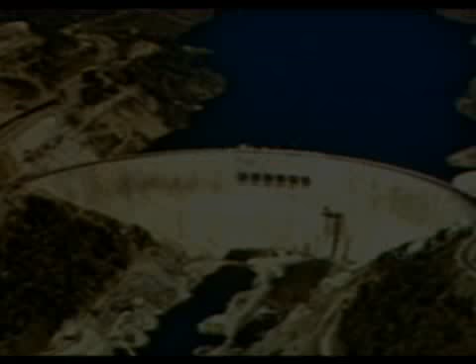Impregilo SPA, listed on the Milan Stock Exchange, is Italy's leading engineering and general contracting company in both the construction and environment sectors, and it's among the main groups on an international level. Impregilo SPA as a company has been active on 5 continents since 1959, while the original shareholders were present on the worldwide market since the beginning of the past century.

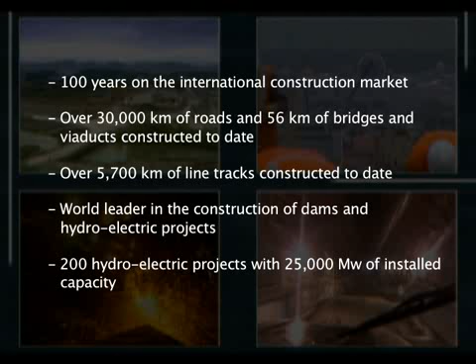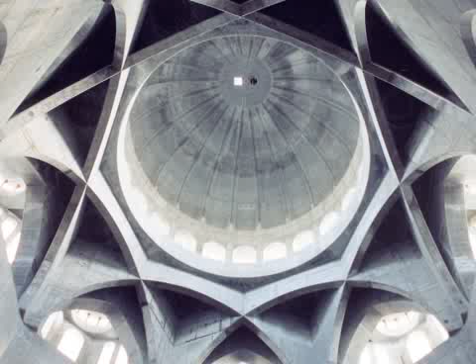From the early 1900s and after the First World War, Girola and Lodigiani, and later Impresit, took part in the construction of major civil engineering works and infrastructure projects, both in Italy and abroad. Subsequently to the incorporation of Cogefar-Impresit and Girola-Lodigiani, the international market was jointly pursued by said companies on a highly competitive basis, participating in the construction of huge projects the world over. The head offices are in Milan, but Impregilo is operative in many parts of the world.

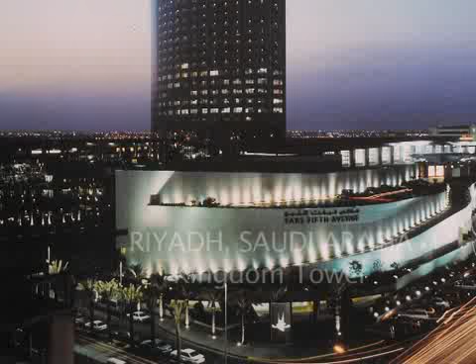Impregilo employs over 20,000 people throughout the world, of which over 1,000 are engineers. At December 31, 2007, the group had a total revenue of €2,530 million, that's construction works only, and a construction backlog of

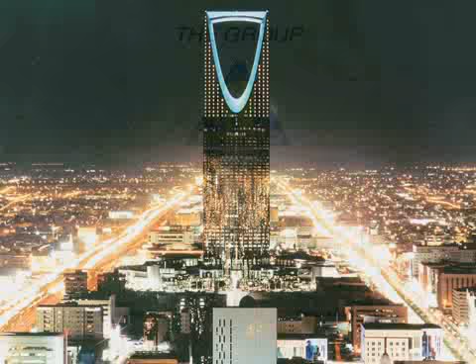€16,944 million. For the execution of the 6th Crossing Suspended Arch Bridge, Impregilo will work very closely with the nominated subcontractors, Cimolai SPA, being involved in the supply and erection of the bridge's steel structures, Cowi and Eden Consulting Engineering, concerning the detailed construction design. In particular, Eden will implement an internal QA/QC system on the design working as an independent checking engineer.

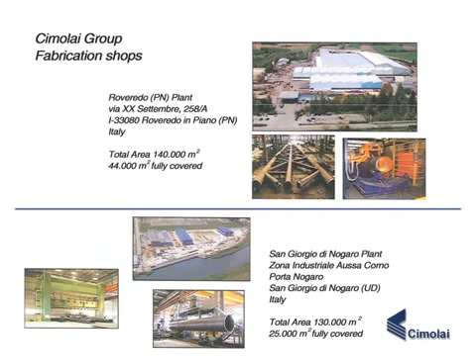Cimolai SPA originates from an individual company, Armando Cimolai SPA, established in 1947 by the founder and father of the current owner, Mr. Luigi Cimolai. The company is a major steel manufacturer operating in Italy and abroad, and is highly specialized in the manufacturing of bridges and viaducts, industrial and civil buildings, military infrastructures, normal and special plate girders for the offshore and shipbuilding industries.

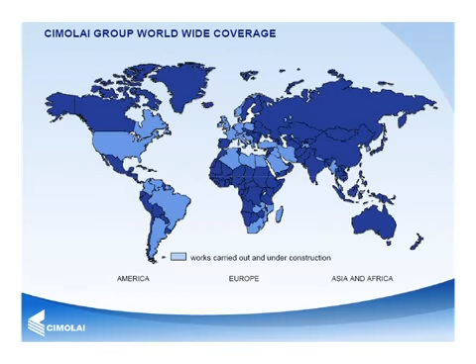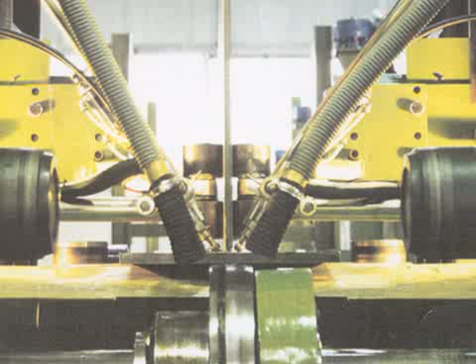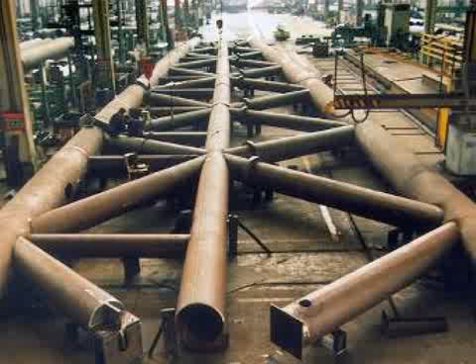Cimolai SPA is operating in many parts of the world, such as the United States, Colombia, Venezuela, Brazil, the United Kingdom, France, Germany, Saudi Arabia, Turkey, and many others. Technical, financial, and human resources are a strong asset to this company. Cimolai SPA employs over 1,500 people throughout the world. The total steel production for the year 2006 was 50,500 tons, which was increased to 65,500 tons during 2007. At the end of 2007, Cimolai SPA generated a turnover of €150,885,000, with investments equal to 6% of the turnover amount.

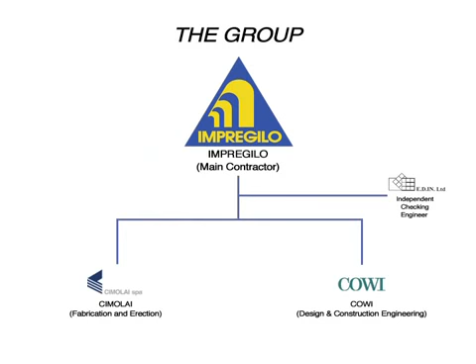Cowi is a Danish private limited company, with the Cowi Foundation as the majority shareholder. Cowi provides consultancy services within the fields of engineering, environmental science, and economics. Cowi's head office is located in Copenhagen. It is supplemented by 11 regional offices throughout Denmark. The Cowi Group maintains an additional 35 branch offices and affiliated offices in Asia, Europe, the Middle East, Africa, and the Americas.

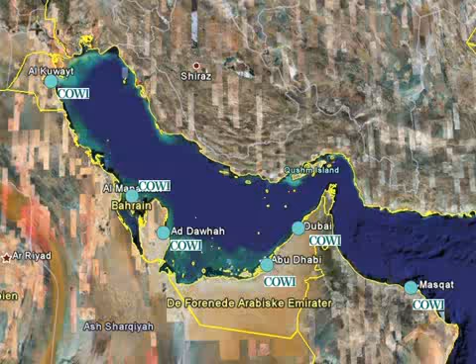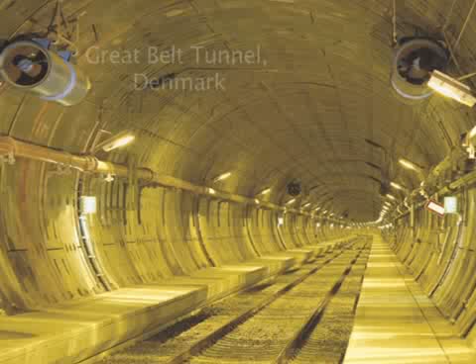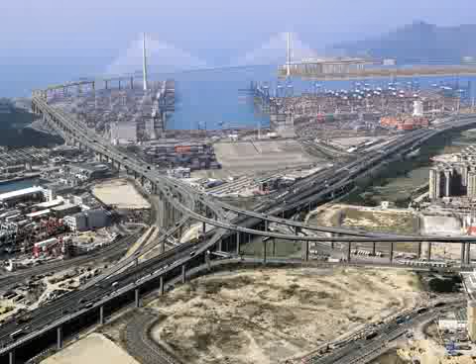Cowi has carried out nearly 50,000 projects in over 175 countries. The company is currently engaged in some 5,300 projects within a wide range of disciplines. Cowi has 4,000 employees, including approximately 2,000 based in Denmark. Cowi employs engineers, biologists, geologists, economists, surveyors, anthropologists, sociologists, and architects. At the end of 2007, Cowi generated a turnover of over €406 million.

E.D.IN. is a leading Italian firm for engineering design, services, and consulting, with special experience in transportation infrastructure, civil structure, complex engineering problems, diagnostic and elaboration of experimental data, activities of research and development.

The proposed group of companies for the execution of the project has already worked together successfully in the past. The Strait of Messina suspended bridge connecting Sicily to the Italian mainland is a fine example of their work. And they are now actually involved in the construction of 2 lots of the Salerno-Reggio Calabria motorway in South Italy.

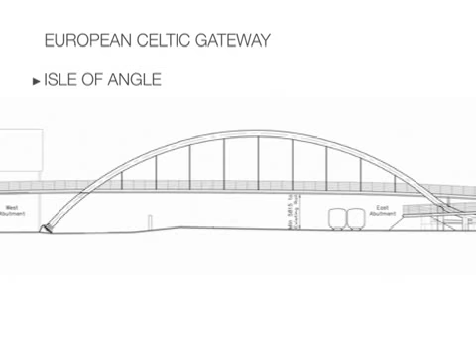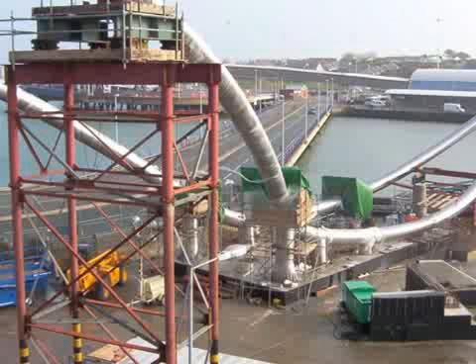A bridge similar in conceptual characteristics to the 6th crossing suspended arch bridge is the European Celtic Gateway, a cable-stayed arch bridge with a concrete deck. The arch is a fabricated tubular element of varying radius, and the deck is an open box girder suitably stiffened.

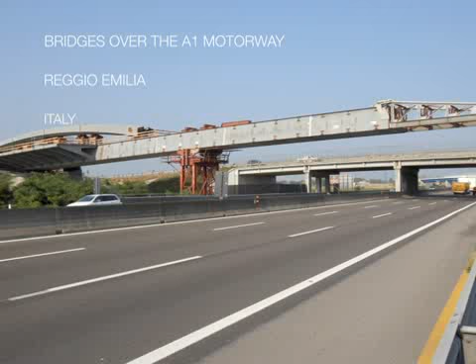Another bridge which can be assimilated to the 6th crossing suspended arch bridge, mainly for the realization, is the 221-meter-long cable-stayed orthotropic steel deck arch bridge over the A1 motorway. Designed by architect Calatrava, the bridge has been designed according to a concept scheme named bowstring. In fact, the arch is bowed and compressed, while the deck is tensioned and straight. The bridge is constituted by a single central arch linked to the deck by means of hangers.

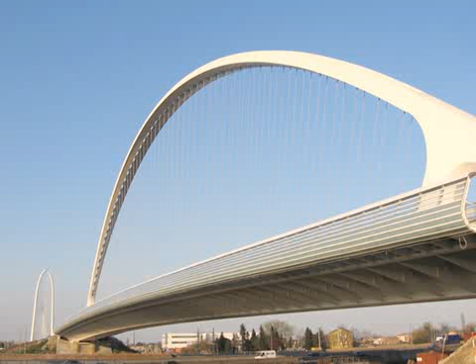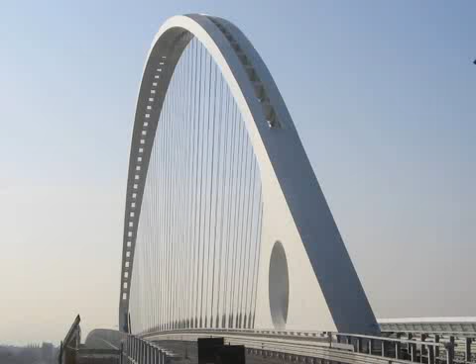With a sunburst pattern, the bridge is 221 meters long, and the net span between the abutments is just over 217 meters, while the maximum height of the arch from the road level is approximately 46 meters. The deck is constituted by a central trapezium cross-sectional box girder, with V-shaped brackets clutched every 3.5 meters on both sides to support the 14-millimeter thick orthotropic plate.

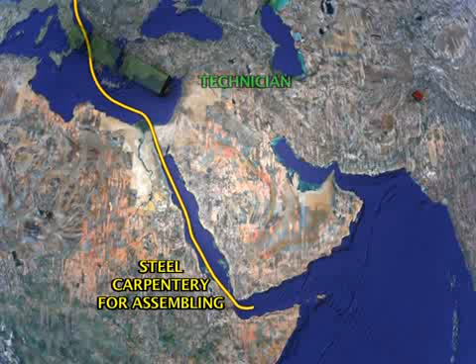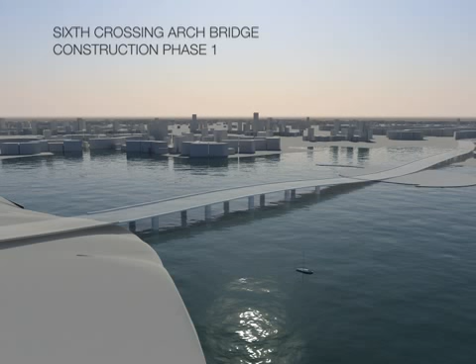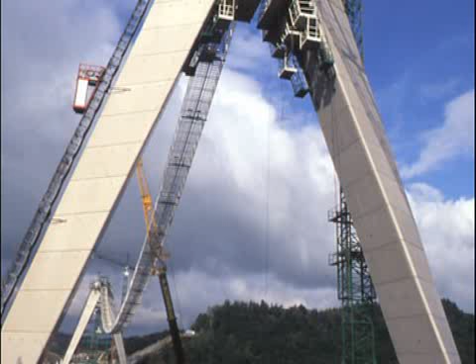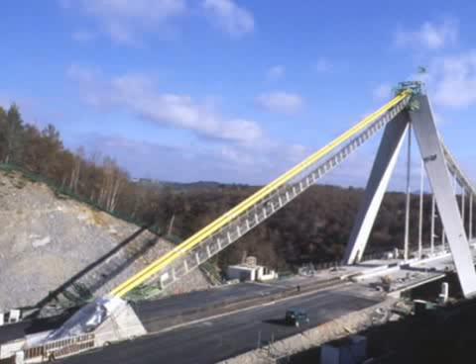For the realization of the 6th crossing suspended arch bridge, we'll make use of worldwide resources in terms of materials, manpower, and management. From a technical point of view, the bridge design concept is such that the main structure is formed by 2 splayed steel arches where the arch thrusts are absorbed by dedicated elements of deck functioning as ties. The bridge deck is formed by an orthotropic steel plate suspended by steel hangers, while the abutments shall be founded on drilled concrete piles.

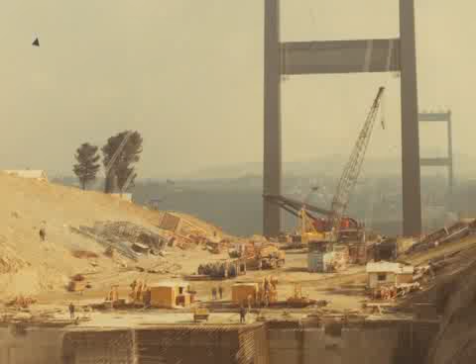The goals we focused on to achieve this are the greater stability and stiffness of the structure, the elimination of horizontal thrusts on the abutment foundations, and to get the best quality of the steel elements for the deck and the arches by manufacturing them in the European Cimolai workshop.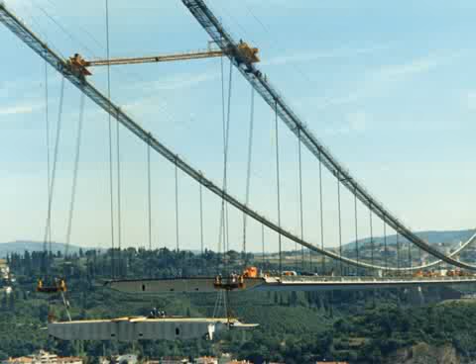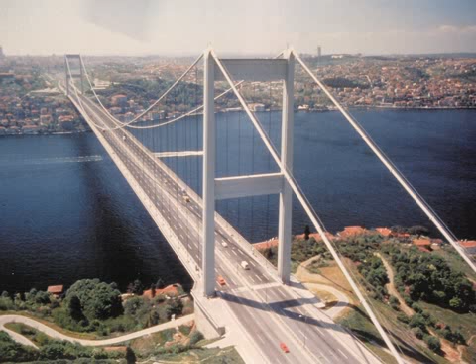During the first construction phase, groups of concrete piles will be drilled and used as provisional piers with spans of 100 meters or 150 meters. The orthotropic deck, pre-assembled in specific areas of the site, will be launched from the rear of the previously constructed abutments onto the provisional piers.

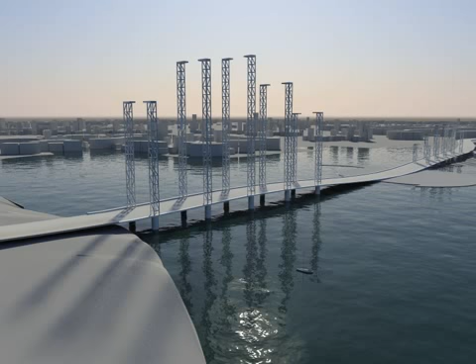In the second phase, the deck will be utilized as a working platform, and provisional steel towers will be erected onto it. A strand jack system will be installed on top of the provisional steel towers to allow the following lift of the complete arch sections.

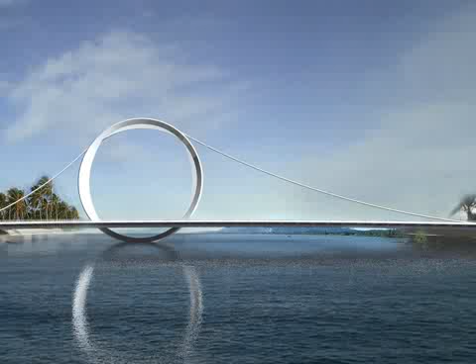In the third phase, all the pre-assembled elements of the arches will be moved over the bridge deck and finally assembled as arch sections. At the same time, the strand jacks of the provisional steel towers will be connected to the pertinent arch sections.

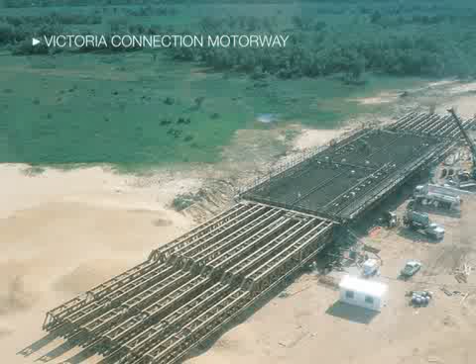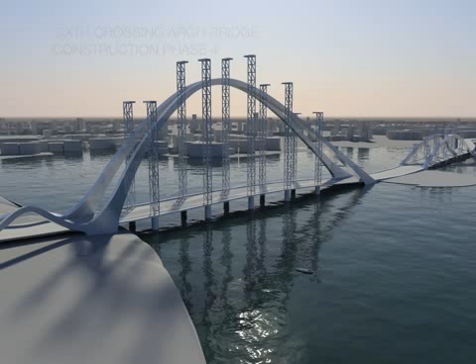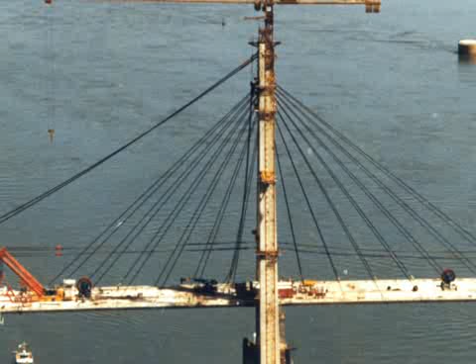In the fourth phase, the complete arch sections will be lifted in multiple stages by the strand jack system, located on the top of the provisional steel tower, to reach the accurate provisional positions for the relevant fitting up. In this particular phase, the hangers will be connected to the arch sections. Finally, the arch sections will be lifted to their final shape and welded.

In the fifth phase, the hangers will be fixed to the deck. A complex and important pre-stress sequence will commence in order to reach the design load of each hanger. After the tensioning of the hangers is completed, all temporary equipment, including the strand jack system and steel towers, will be removed, and the provisional piers will be demolished.